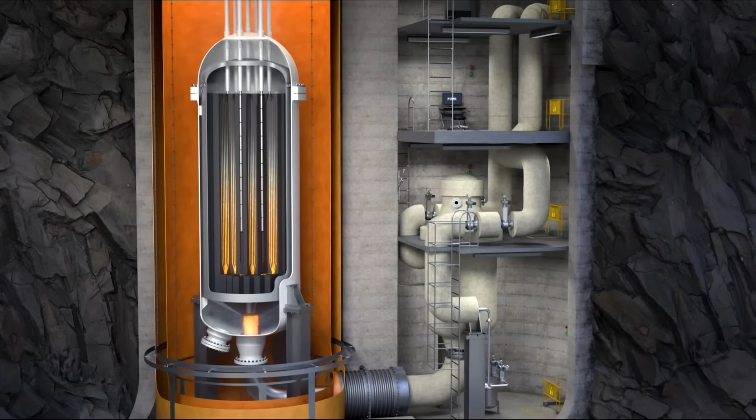Possibly. There are new nuclear reactors emerging that are cheaper, safer, and faster to deploy than the reactors built decades ago. They just need investment to reach scale and drive down their cost, which could very well materialize.

For example, Elon Musk is hatching plans for 1 terawatt of compute, which is roughly equal to the entire output of the U.S. grid. Such ambitious growth plans from Elon and others could provide the sustained high prices and investment environment necessary to develop new reactors.

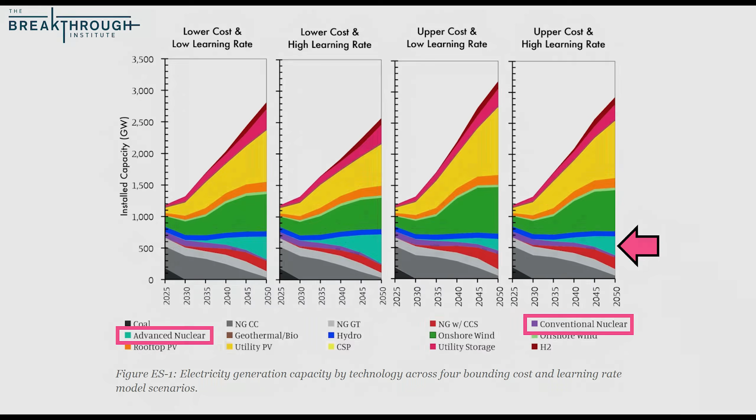So today, I'm going to walk you through the basics of those new nuclear technologies and the bull, bear, and base case for nuclear power in the coming decades.

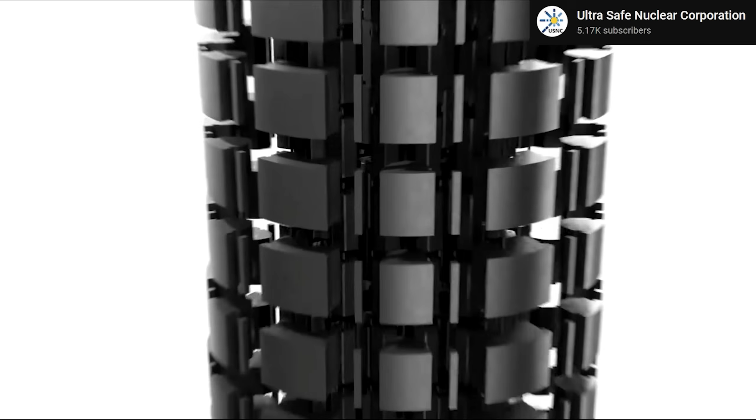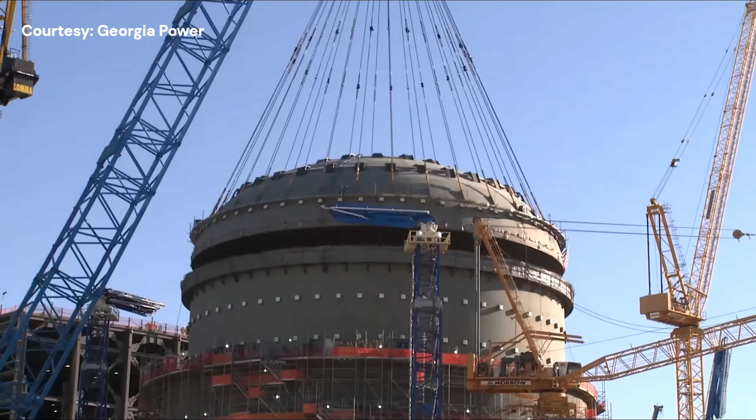Note that this video will be focused on nuclear developments in the United States because most of my audience is US-based. There is, of course, exciting things happening in China with energy as well, but that would require its own separate video. To kick things off, there's a lot of excitement about new nuclear reactors that are cheaper and safer, which are collectively known as advanced nuclear reactors.

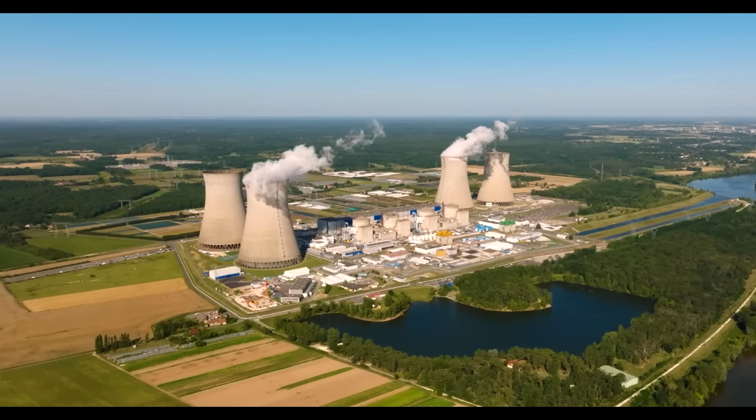To understand what advanced nuclear is and its benefits, let's start with light water reactors, which have been the mainstay of the nuclear industry for almost 70 years.

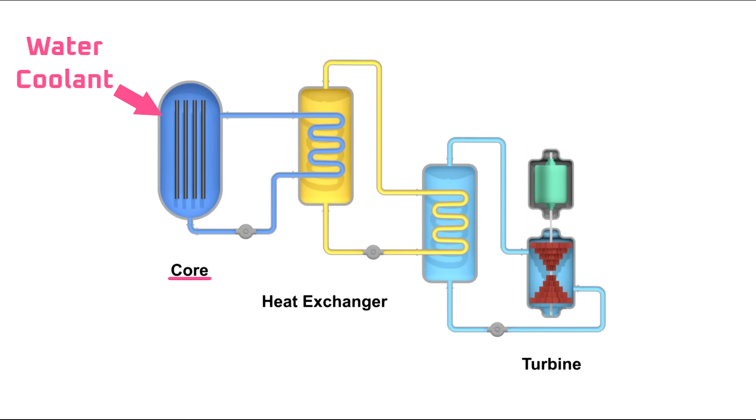In a light water reactor, such as a pressurized water reactor, water is used, among other things, to cool the reactor core. That water has to be kept at high pressure to keep it in a liquid state, because if it turned into steam, it would lose its effectiveness as a coolant.

Then, the coolant from the core is run through a heat exchanger, which feeds heat to boil lower pressure water that generates steam and drives a turbine that generates electricity.

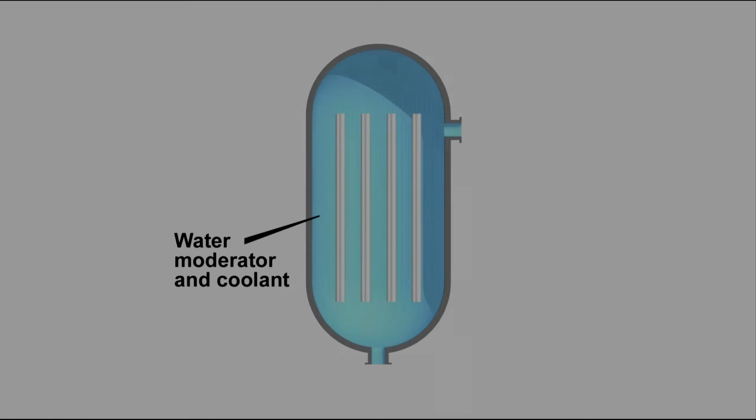The drawback of light water reactors is that they require a constant supply of water to cool the reactor core. If the flow of water stops, the reactor risks a meltdown, leading to boiling water, a steam or hydrogen explosion, and the release of radioactive material.

As a result of the inherent risks of light water reactors, the cost of nuclear power in some jurisdictions has been steadily increasing since the 1970s due to regulation and increased safety standards, construction delays, and financing and insurance costs.

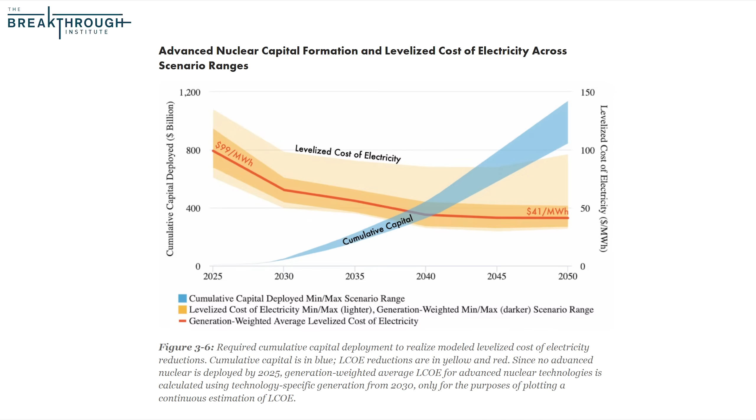The primary goal of advanced nuclear reactors is to make nuclear power cheaper and safer. As a result of that loose definition, advanced nuclear reactors as a category is pretty broad.

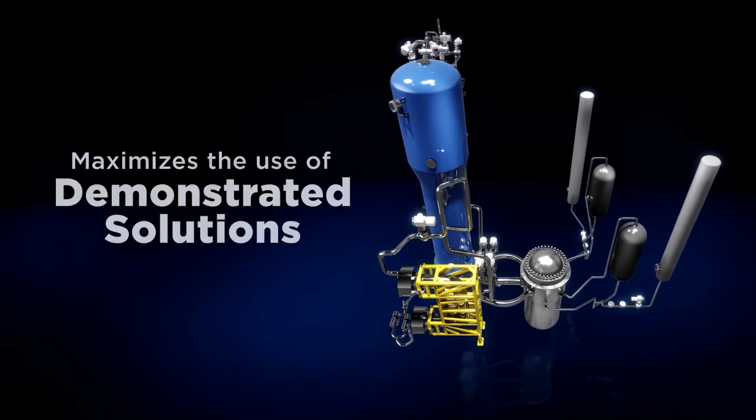It includes everything from improved versions of light water reactors to more exciting reactor designs like molten salt reactors and even fusion reactors, which probably warrant a video of their own.

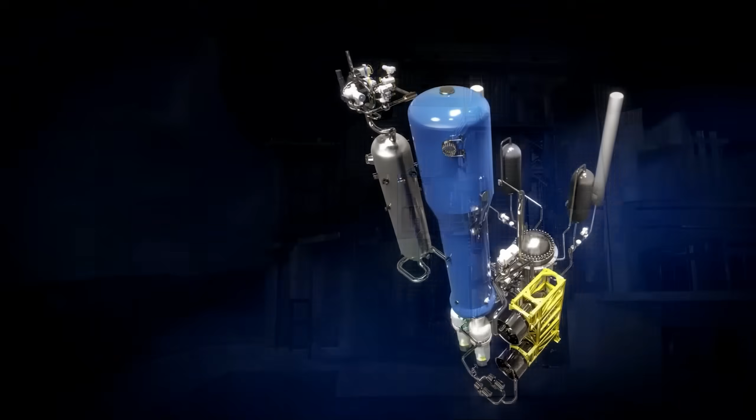In the case of improved versions of light water reactors, the increased safety is achieved through passive safety mechanisms that can cool down the reactor core in the event of a power outage, more robust containment for the reactor core, and better monitoring and control systems.

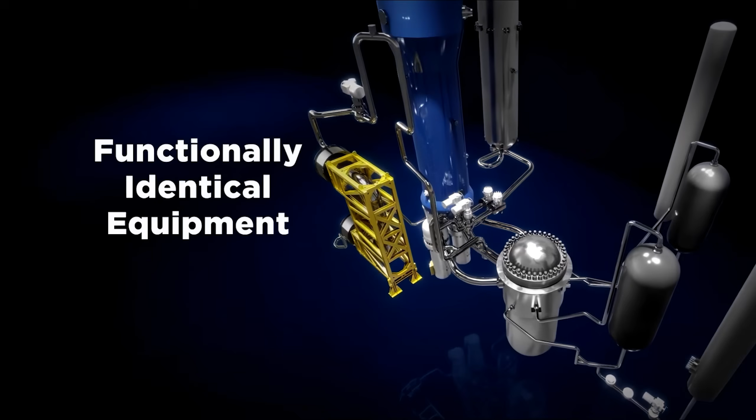Although those features add expense, the nuclear industry is also working on standardizing those light water reactors, reducing their size, and increasing their production volume to counteract those costs.

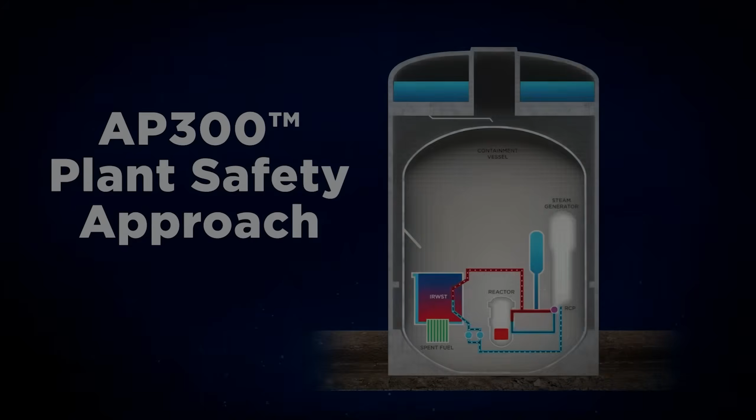That's a promising approach, but the advanced nuclear reactors that have most captured the public's imagination are what's called fourth-generation reactors. Fourth-generation nuclear reactors are designed from the ground up so that a nuclear meltdown is impossible. There are dozens of fourth-generation nuclear reactor designs, but let's look at a molten salt reactor as an example.

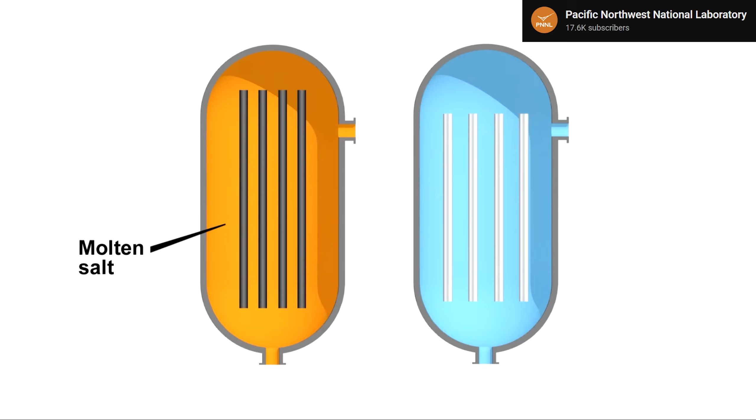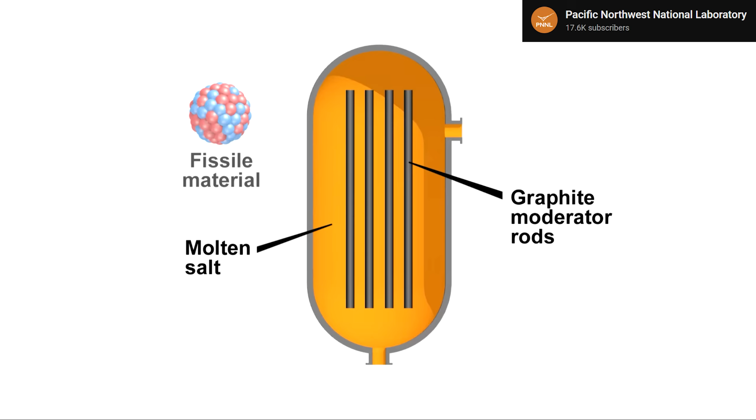For a molten salt reactor, rather than water being used as a coolant, a salt mixture is heated to its liquid or molten state, which is then used to heat and boil water to drive a steam generator. That molten salt is not only used as a coolant, but also contains fuel, such as thorium, to drive the nuclear reaction. That thorium salt mixture, in turn, interacts with graphite moderator rods that increase the number of nuclear reactions that take place.

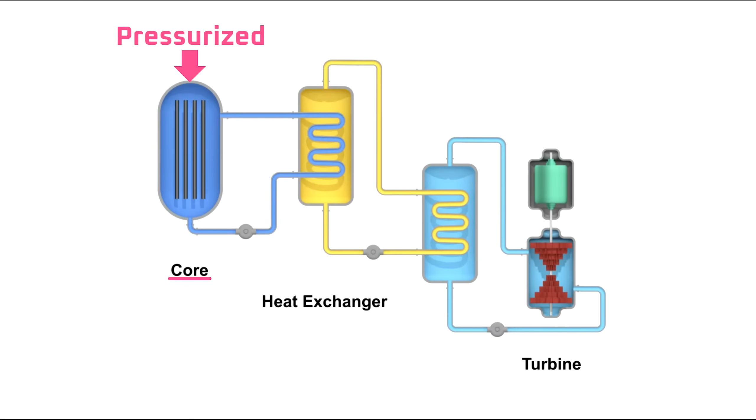A molten salt reactor creates a number of safety benefits, but let's look at just three. First, due to the fact that liquid salt has a much higher boiling point than water, it doesn't need to be pressurized to keep it in a liquid state. That means the risk of explosion is all but eliminated.

Second, as the molten salt heats up, it expands, which reduces the fissile atom density of the fuel and slows down the nuclear reaction. That means the reactor should never overheat unless the incorrect mixture of thorium and salt are used.

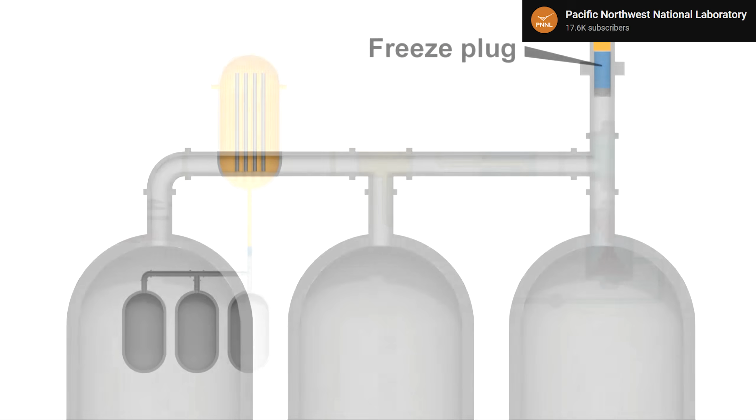Third, if the incorrect mixture is used and the molten salt gets so hot that it risks boiling, there's a freeze plug at the bottom of the reactor tank that will melt before the molten salt hits its boiling point. When the plug melts, the molten salt drains away into large, passively cooled storage tanks.

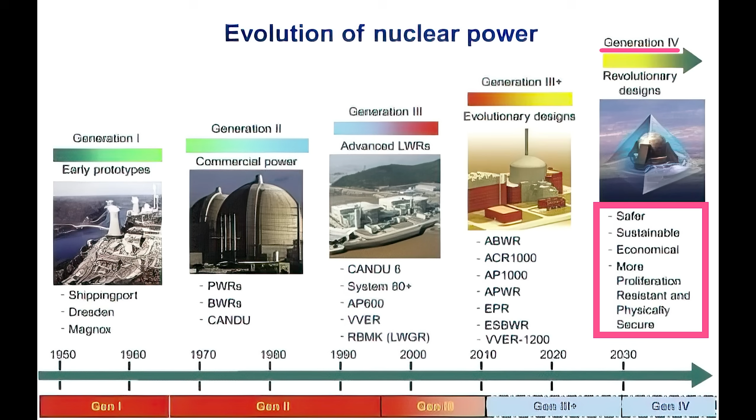Besides their inherent safety, fourth-generation nuclear reactors also have greater efficiency and sustainability, and it's much more difficult to use their fuel for nuclear weapons.

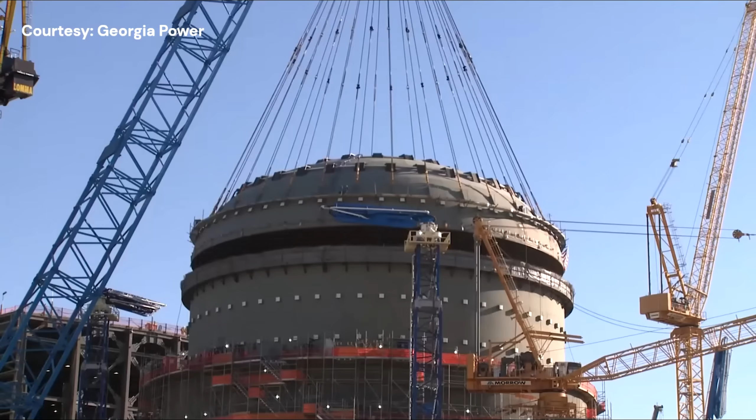Let's move on to why fourth-generation nuclear reactors could produce lower-cost power than traditional light water reactors. Once again, we'll use a molten salt reactor as an example. Due to the fact that molten salt reactors operate at low pressure, the reactor containment vessel doesn't need to be as robust, which reduces construction and material costs.

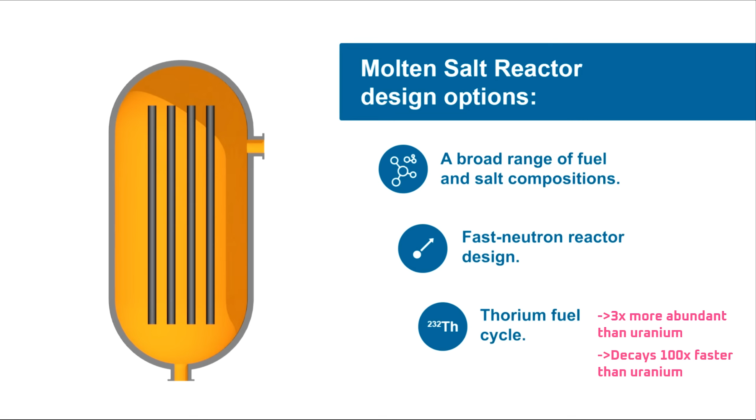Second, molten salt reactors can use a variety of fuels. Most use thorium because it's abundant, and the nuclear waste it produces would have a half-life of hundreds of years rather than tens of thousands of years. But molten salt reactors also have the potential to use nuclear waste from existing nuclear reactors as fuel. However, reprocessing that nuclear waste into fuel could be cost prohibitive. So for now, using thorium will likely be easier.

Third, molten salt reactors operate at higher temperatures than light water reactors, so their steam cycle generates electricity more efficiently.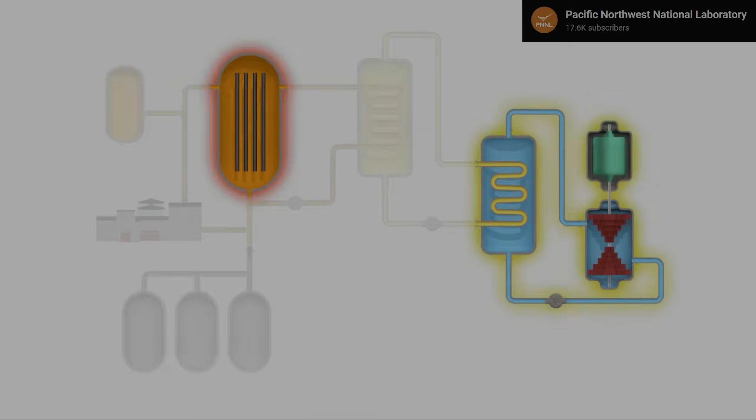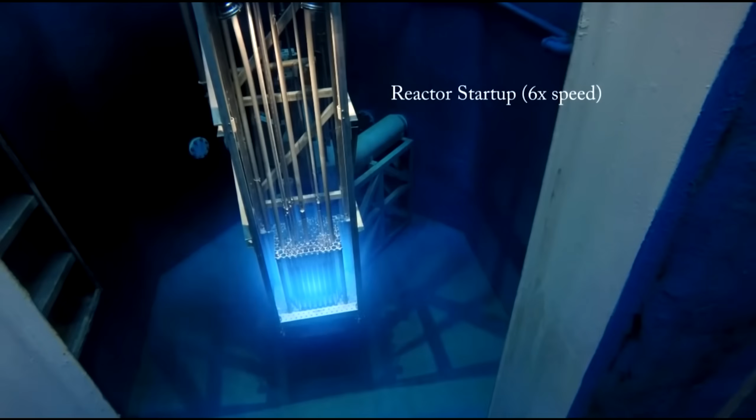Fourth, molten salt reactors require less downtime. That's because the liquid fuel can be pumped out of the reactor while it's running to remove waste products, and new fuel can be added to top up the reactor. That's as opposed to light water reactors, which have a multi-day shutdown and restart process once every several months to replace the fuel, which results in an uptime of around 90% rather than the closer to 100% that may be possible with molten salt reactors.

Fifth, many companies are working on molten salt SMRs, or small modular reactors. A typical nuclear plant has an output of around 1 gigawatt, which requires a huge reactor that makes building a nuclear plant a massive undertaking.

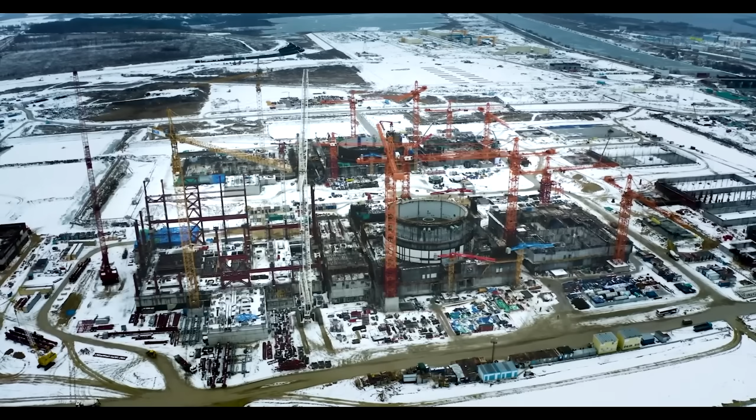The maximum size of a small modular reactor is 300 megawatts, but they're usually much smaller. That means they can be produced in large numbers in a factory, which should, in turn, drive down their cost. Furthermore, small reactors have lower investment costs for development, faster construction times, the ability to right-size the power generation for the market or use case, and greater flexibility for where the reactors can be located.

With all that in mind, how cheap can fourth-generation small modular reactors get? Let's take a look at Aalo Atomics as an example. Aalo is developing a 10-megawatt reactor called the Aalo-1.

Their first 7 reactors are expected to come online before 2030, and the electricity is estimated to cost 10 cents per kilowatt hour. At scale, those reactors are expected to produce electricity at around 7.5 cents per kilowatt hour in the early 2030s. Then, they plan on developing a 100-megawatt reactor called the Aalo-2 in the 2030s and scale its production, eventually hitting 2 to 3 cents per kilowatt hour.

If they achieve that goal, it would be cheaper to produce electricity from an Aalo-2 reactor than a fully depreciated light water nuclear power plant, which currently costs about 3.2 cents per kilowatt hour.

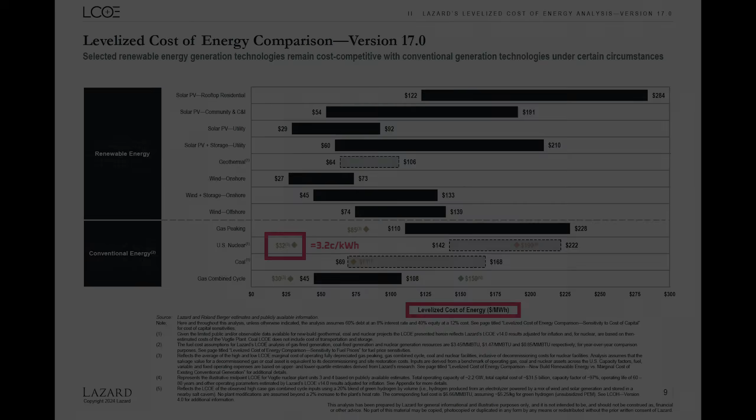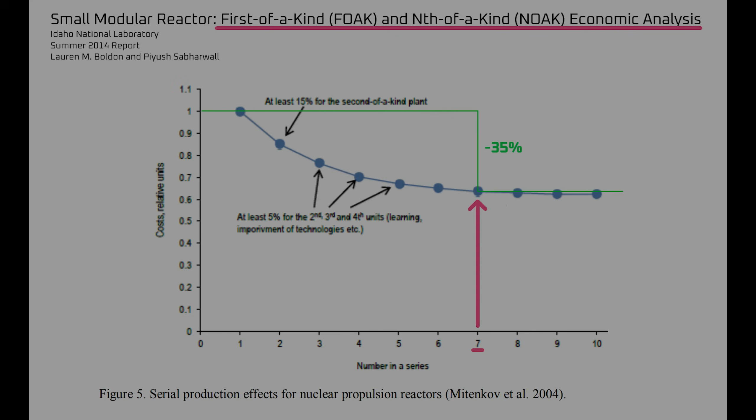Is that goal realistic? There are two scaling factors to consider when looking at the cost of nuclear reactors. The first is the number of a type of reactor that's been produced. After about 7 reactors have been produced, the cost reductions flatten out at about a 35% cost reduction. That's probably why Aalo Atomics is planning to build not just one, but 7 reactors when they start production of the Aalo-1.

If they built just one reactor, the cost would likely be about 16 cents per kilowatt hour or more rather than 10 cents. Then the cost curve flattens out, and they have to build hundreds of nuclear reactors to achieve 7.5 cents per kilowatt hour.

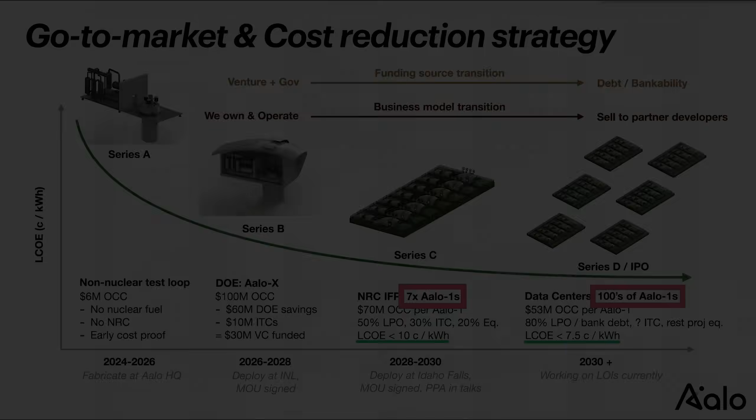The second scaling factor is reactor size. The larger the reactor, the cheaper the cost per megawatt hour of electricity. That's why, in order to hit 2 to 3 cents per kilowatt hour, Aalo has to scale their 10-megawatt reactor by an order of magnitude to 100 megawatts.

That's how Aalo gets from 7.5 cents per kilowatt hour for the Aalo-1 to 3 cents per kilowatt hour for the Aalo-2. It benefits from both scaling functions by being a moderate-sized reactor with a production volume of hundreds of reactors. But it also means it would be extraordinarily difficult to go from 3 cents per kilowatt hour to 2 cents per kilowatt hour due to the plateau in the cost curve.

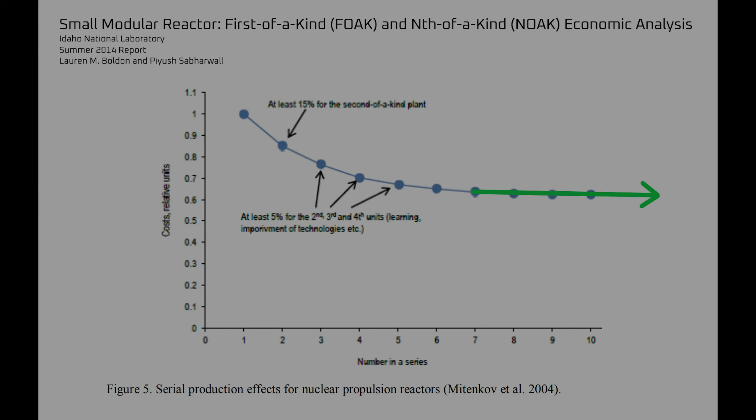That 1 cent cost reduction might require building thousands of 100-megawatt reactors. That's a daunting execution challenge that will require Aalo and other nuclear startups to either find investors with deep pockets through the early growth stages, or find a market for their higher-priced electricity while they scale their reactor output and size to reduce costs. If Aalo or any other company can pull that off, they could eventually take market share from solar, wind, batteries, and combined cycle gas turbines.

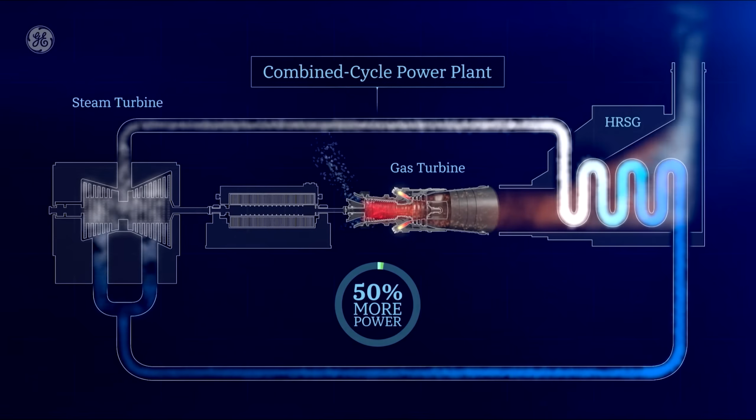But that's likely over a decade away, because it's going to take that long to finish developing the reactors and scaling their production. And to be clear, that rough timeline applies to all types of advanced nuclear reactors, including fusion reactors, because as the table on screen shows, in the US, all of them are still in development or prototype phases. As a side note, the table on screen only covers small modular reactors in the 50 to 300 megawatt range. If you're curious, here's a second table that covers micro reactors of 50 megawatts or less.

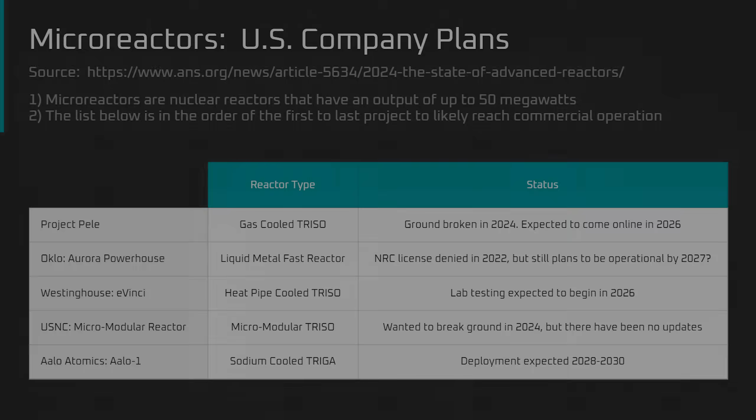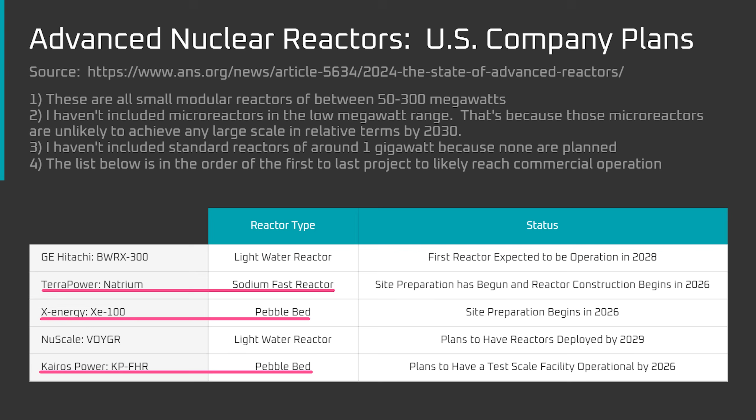Either way, in my view, of all the advanced nuclear reactors, small modular fourth-generation reactors have the best shot at succeeding and reaching 2 to 3 cents per kilowatt hour. But it's not guaranteed. The question is, what are the odds?

Let's start with the bull case. First, the U.S. is expected to at least double its electricity consumption by 2050. That demand could mean higher electricity prices to support the development of advanced nuclear reactors.

Second, the Department of Energy is investing billions into advanced nuclear power. That includes both billions of dollars for the reactors themselves and also the nuclear fuel supply chain.

Third, there's also billions of dollars of private investment flowing into nuclear. According to PitchBook, investments increased by 400% between 2015 and 2022, and it's likely that that trend will continue.

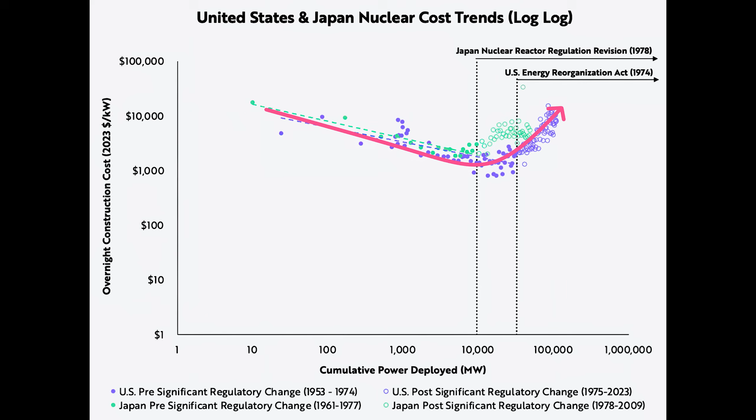Fourth, in July of last year, the ADVANCE Act was passed, which requires the Nuclear Regulatory Commission to accelerate the deployment of nuclear reactors. That's significant because, as I showed earlier, regulation is one of the major cost drivers for nuclear power.

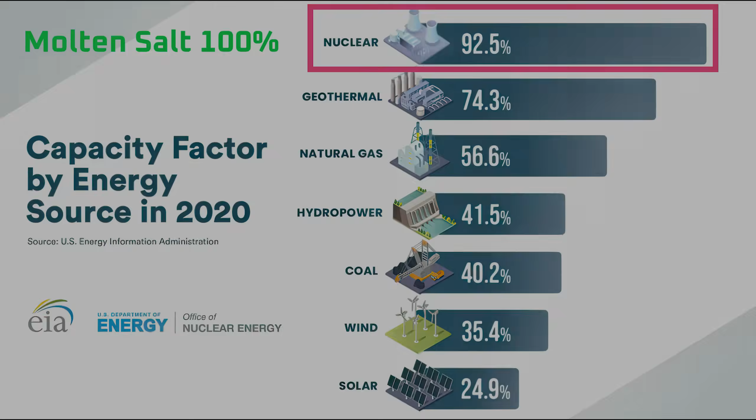Fifth, some industries are willing to pay a cost premium for nuclear power because it offers a constant supply of high uptime electricity that also has very low CO2 emissions. That's exactly what happened with Microsoft's planned restart of 3 Mile Island, which is estimated to produce power that costs about 13 cents per kilowatt hour, a 50% cost premium over solar, battery, and gas generation-based options.

Sixth, many advanced nuclear reactors can reach much higher temperatures than conventional light water reactors. Those high temperatures are a useful byproduct that can be used by a number of industries, which is called cogeneration. That could significantly increase the value, profit, and therefore viability of many advanced nuclear reactor designs.

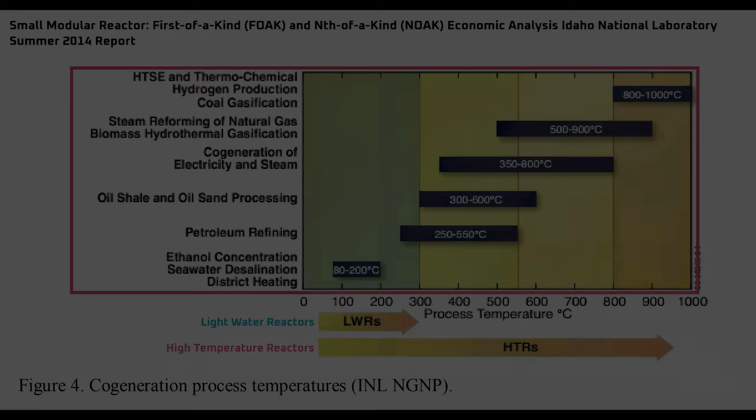I could easily do a half-hour video on both the bull and bear case for nuclear, but let's stop at 6 key points for each rather than getting into the weeds.

What all this means is that there appears to be strong financial support to incubate advanced nuclear, a strong market for advanced nuclear power, and despite higher initial electricity costs, the economics could work out in the long run.

If that all turns out to be true, what could the growth of nuclear look like in the next 25 years? The most bullish forecast I could find for nuclear was from the Breakthrough Institute. They created 4 forecasts for the U.S. power grid that included a variety of cost reduction assumptions for nuclear, solar, wind, and batteries.

Their conclusion was that by 2050, advanced nuclear power could make up between 6 to 21% of total generation capacity, and conventional nuclear would drop to almost nothing. But during that time, the total generation capacity of the U.S. is expected to at least double.

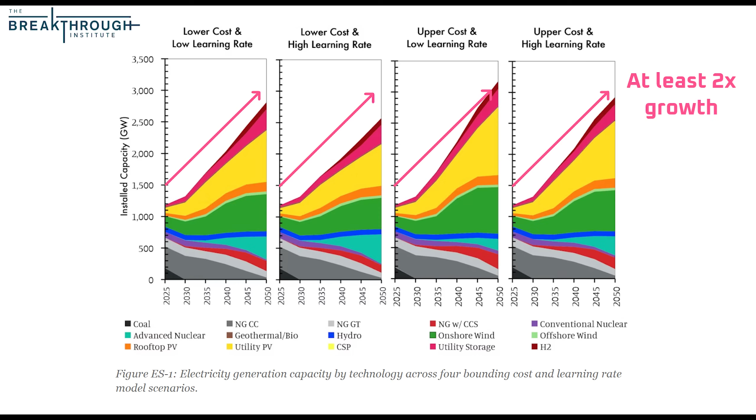That means in the next 25 years, the Breakthrough Institute expects nuclear power generation as a whole to increase by 2 to 5 times. In my view, that would qualify as a nuclear renaissance, but it's not likely.

Let's move on to the bear case for nuclear. First, regulatory easing may not be enough to accelerate the build-out of advanced nuclear power plants. That's because many of the delays with nuclear plants are construction-related.

According to James Krellenstein, the average construction time for 42 nuclear reactors built in China in the last 2 decades was 5.5 years. However, when they adopted U.S. vendors and project delivery methods to install the same type of reactor that was used for the recent Vogtle nuclear plant build-out in Georgia, it took an average of 9.4 years, which is pretty much in line with the timeline that Vogtle experienced. That is, although there are regulatory issues slowing down the progress of nuclear, the construction efficiency of U.S. nuclear projects is also to blame.

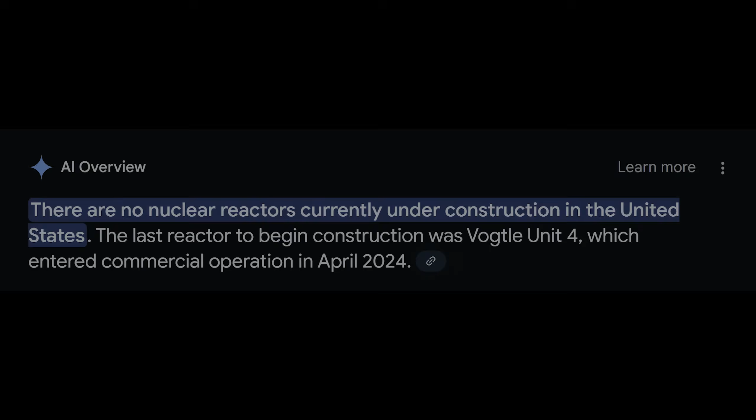The second point for the bear case is that there are no nuclear reactors currently under construction in the United States, and those that are planned to be built are experiencing delays from both regulatory issues and, for example, sourcing fuel. Fuel sourcing is an issue for all nuclear plants in the U.S. because the U.S. stopped mining uranium over a decade ago, and much of the fuel for nuclear plants comes from countries like Canada, Kazakhstan, and Russia.

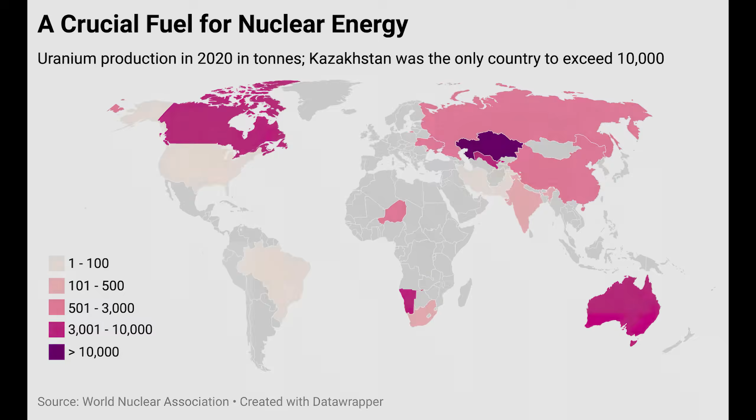The fuel issue is even more difficult for advanced nuclear reactors because they usually have specialized fuel requirements. As I said earlier, the U.S. is working on rebuilding its nuclear supply chain, but that'll take time.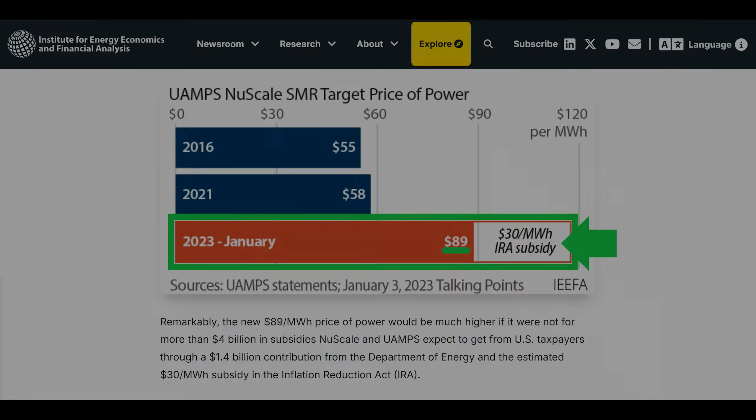The third point for the bear case is cost overruns. For example, the cost to generate electricity for NuScale's advanced nuclear reactor was originally estimated at $55 per megawatt hour. But in 2023, that was revised up to $89 per megawatt hour, and that's inclusive of a $30 per megawatt hour subsidy, meaning the total cost per megawatt hour is almost as high as restarting 3 Mile Island, and it likely would have ballooned from there, so the NuScale project was canceled.

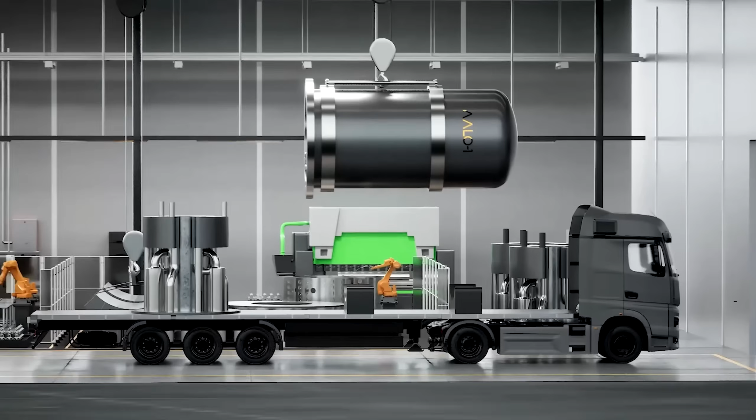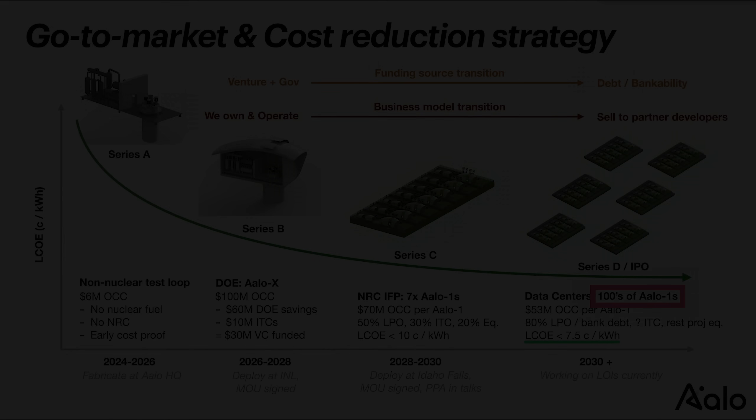The fourth point of the bear case is that many of the reactors that are being hyped by nuclear bulls are microreactors that can, for example, fit on the back of a truck. As I showed earlier, it requires a certain amount of scale, both in terms of reactor size and production output, to drive down the cost of nuclear power. That means microreactors will always come at a cost premium because they're smaller, so they'll never be cost competitive for 99% of use cases. Rather, as Aalo's strategy suggests, they're a stepping stone that will be useful in the late 2020s to early 2030s, which lead to larger reactors in the mid to late 2030s.

The fifth point of the bear case also has to do with scale, but in a way you might not expect. What do I mean by that?

As I said earlier, in order to reach the scale required to drive the cost of nuclear power down to 2 to 3 cents per kilowatt hour, it could require building hundreds or even thousands of small modular reactors. For example, 1,000 small modular reactors of 100 megawatts each would be 100 gigawatts, which is equivalent to the entire nuclear generation capacity of the United States.

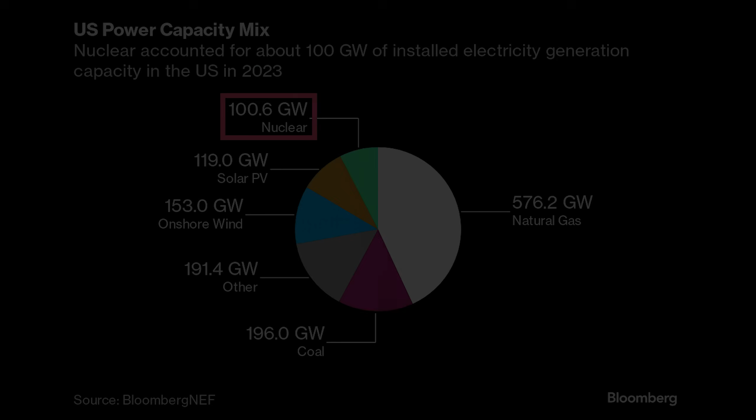In a sense, nuclear power is a victim of its own power density. It produces so much power that it takes a colossal amount of energy demand to bring it to a scale where it's low cost. But as I said at the beginning of the video, the era may be dawning where we need not just thousands, but tens of thousands of small modular reactors.

Elon Musk is talking about bringing a terawatt of compute online, which will likely happen in the next 10 to 15 years if history is any guide. In the meantime, solar, batteries, and gas generation are the fastest and cheapest energy to deploy, and they're only getting cheaper. That means they'll have a cost advantage for at least a decade, while advanced nuclear fumbles through its development and scaling stages, and that cost advantage may persist even if nuclear hits terawatt scale.

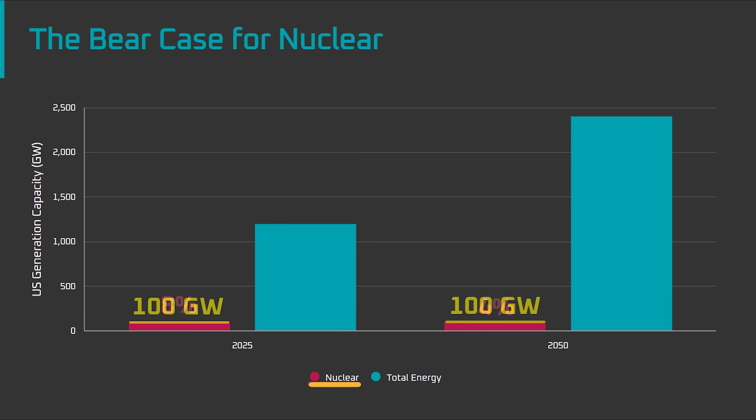With that in mind, in my view, the bear case is that nuclear generation remains relatively flat between now and 2050 at about 100 gigawatts. If U.S. generation capacity doubles during that time, it would mean that nuclear decreases from about 8% of power generation capacity to about 4%. That would mean only enough advanced nuclear would come online to replace retiring nuclear plants.

Lastly, what about the base case for nuclear? In my view, both the bull case of 5x growth in nuclear and the bear case of no growth are equally unlikely. What's most likely is that we see nuclear grow in proportion to the rest of the grid, roughly doubling by 2050.

That's because although I expect nuclear will shrink as a proportion of the grid in the next 5 to 10 years due to the growth of solar, wind, and batteries, there's a good chance that nuclear will see a large build-out after 2035 thanks to a more favorable regulatory environment and the development of nuclear reactors that are expected to be highly cost competitive.

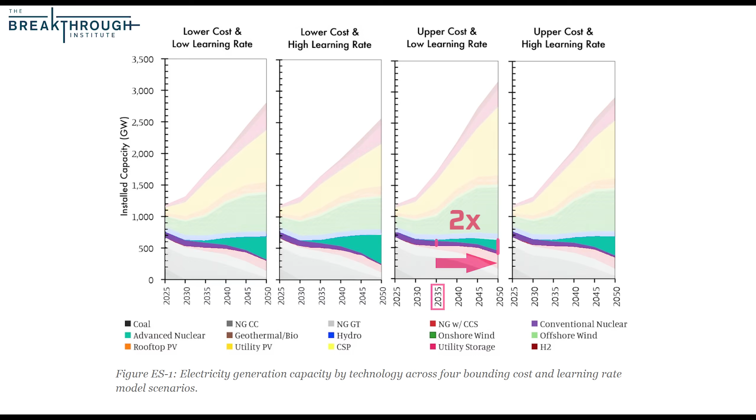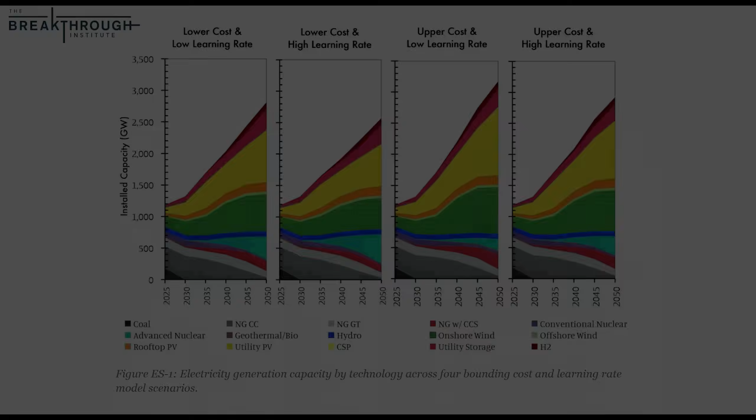In summary, it's difficult to know exactly what the future of nuclear power will look like in 25 years because it involves looking at several exponential curves. However, by understanding the individual technologies involved and the overall energy landscape, we can arrive at a fair educated guess. The first set of exponentials are solar, wind, and batteries, which are swallowing up electricity generation market share quickly, and that's only going to accelerate in the next 10 years. This is a near certainty.

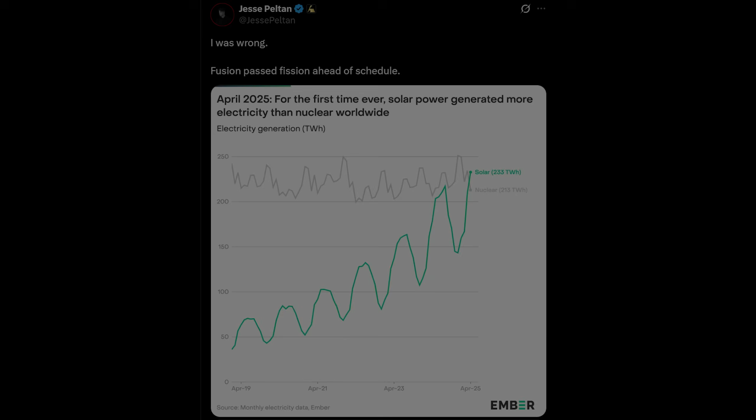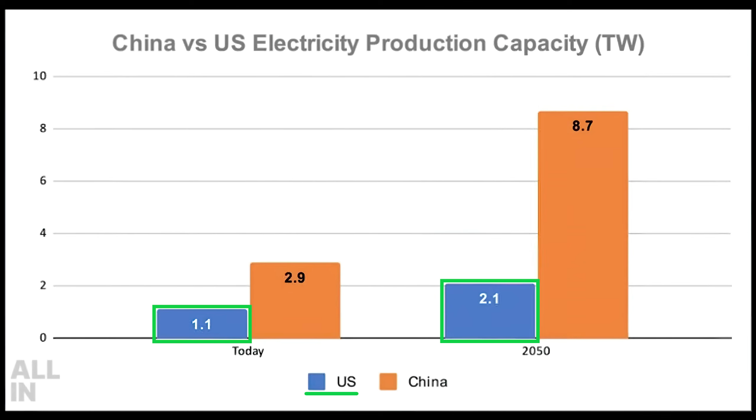The next exponential is that, after several decades of stagnation, U.S. electricity demand is poised to double or triple in the next couple of decades due to decarbonization and therefore electrification, as well as new technologies like artificial intelligence and cryptocurrencies. This is also a near certainty.

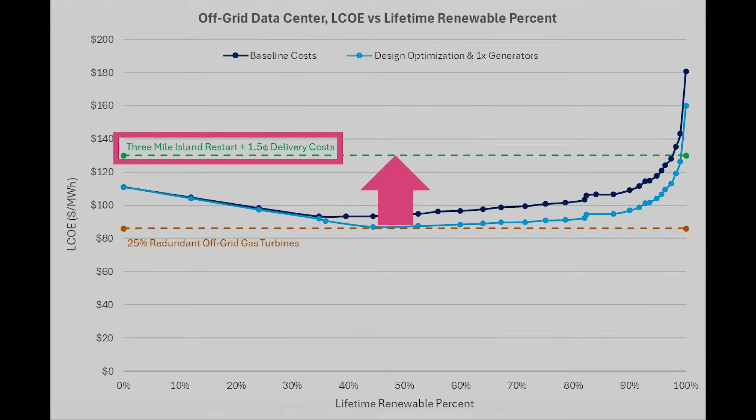Lastly, although nuclear generation has been flat for many years now, the fact that nuclear plants are being reopened tells us that there's a market for nuclear energy, even if it comes at a cost premium. If advanced nuclear reactors are developed that are cost competitive with or provide support for intermittent renewables and are also safer and easier to deploy, it stands to reason that we could see a renaissance in nuclear power.

However, in my view, that window of opportunity is narrow, maybe 5 to 10 years at best, before solar, wind, and batteries achieve an insurmountable scaling lead. So, we need to see next-generation nuclear plants coming online in the next 5 years. If not, the best chance for the future of nuclear will be to act as a flywheel for a new civilization on Mars. But that's a topic for another video.